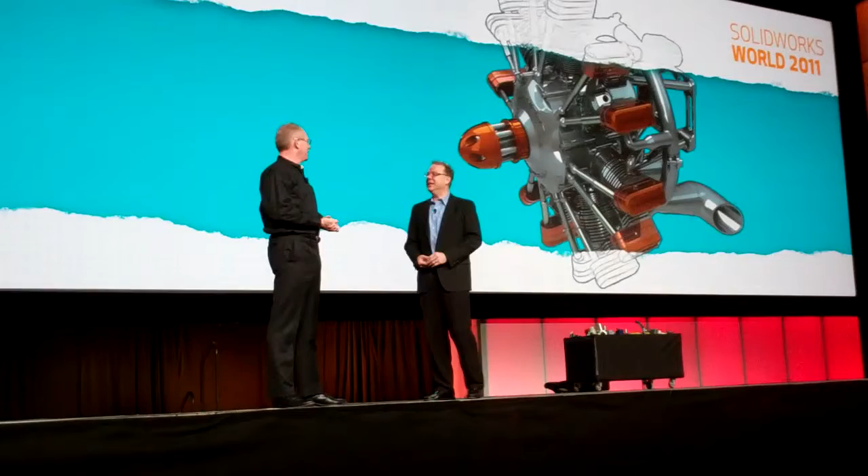Welcome to SolidWorks World, Bill. Thank you, wow, there's more than one user now. Yeah, there's more than one user, right. Back in the day, we could have had SolidWorks World just by going for lunch together. That would have been the whole thing right there. And I understand you just hit 1 million users recently. Yeah, we have over 1 million SolidWorks users now. Thank you all, it's you guys that do it. This is 5,000 seating capacity, right? The other 995,000 showed up. It doubled the population of San Antonio. Oh yeah, that's true, we might have more SolidWorks users than would fit in the city. That would be a nice problem.

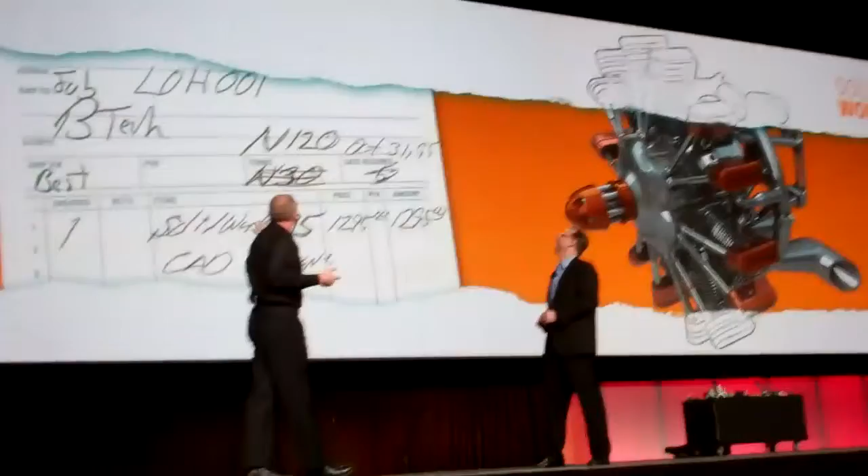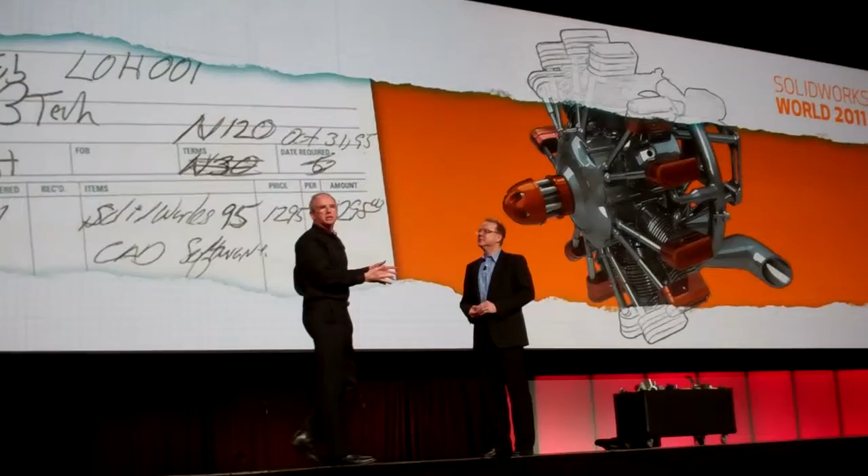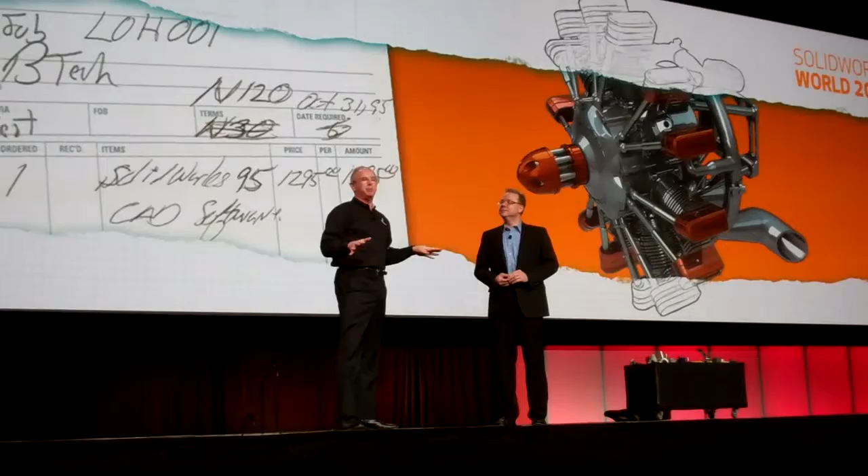Bill, thanks for being customer number 1, but beyond just giving us the order for SolidWorks, Bill gave us a whole lot more. Before we ever took any orders, when I was deciding whether or not to start the company, I went to Bill for advice. He was my friend and advisor, and he gave me encouragement. He said, John, go do this thing. Without his advice and support and encouragement, we all might not be here today. So thank you, Bill, again. Okay, that was great. I don't know what you're thanking me for, but I should be thanking you, I think. Well, anyway, it's been great.

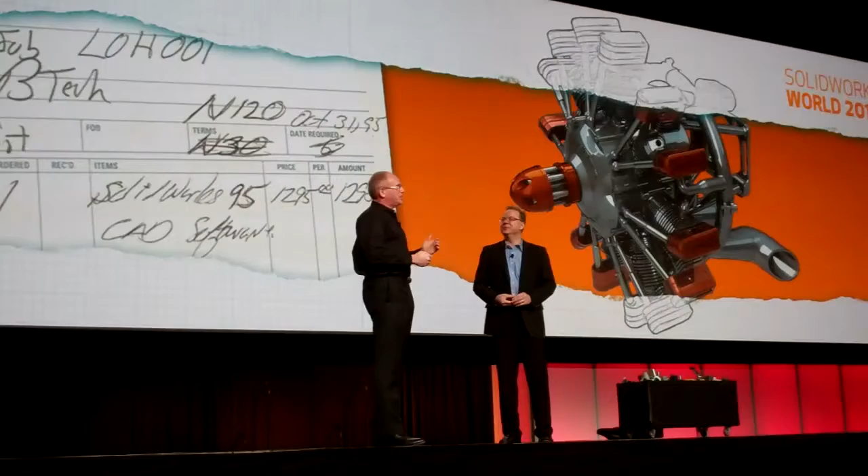So Bill, there were lots of robots in the world for many years, lots of old robots existed before you started Barrett Technology, right? Yep. So why start Barrett? Why build new robots?

Well, we wanted to have robots that worked around people. Before we came along, there was sort of what we call robotics 1.0, which is robots that go from point A to point B, point A to point B, and do that for 5 years. We wanted to go beyond that. These robots were very dangerous around people, and the rule was to segregate the people from the robot. It didn't make sense. If you were going to look into the future and there was going to be, for example, robotic surgery, how do you separate the robot from the person? So we call that robotics 2.0, and I think that's starting to come into its own.

And we actually have video here, starting with the handshake. These are Bill's robots from Barrett Technology, robotic arms. Right, and so those aren't pre-programmed, the handshake is not pre-programmed. It's just following the forces of the handshake. I think that's iconic of working with humans.

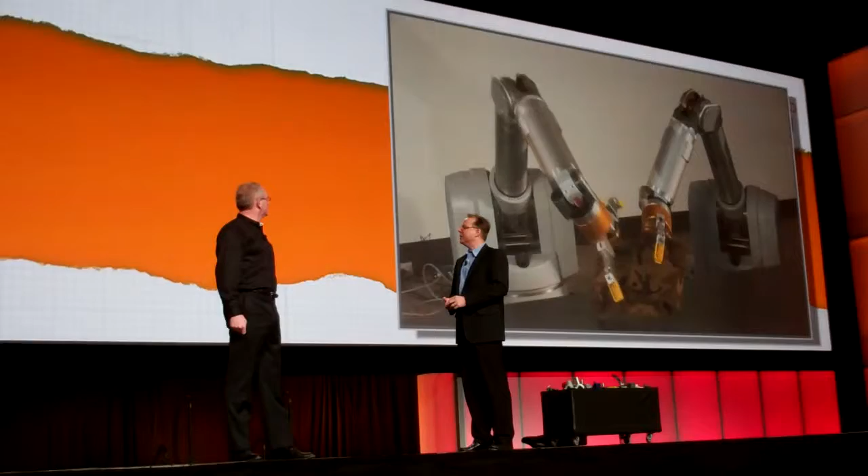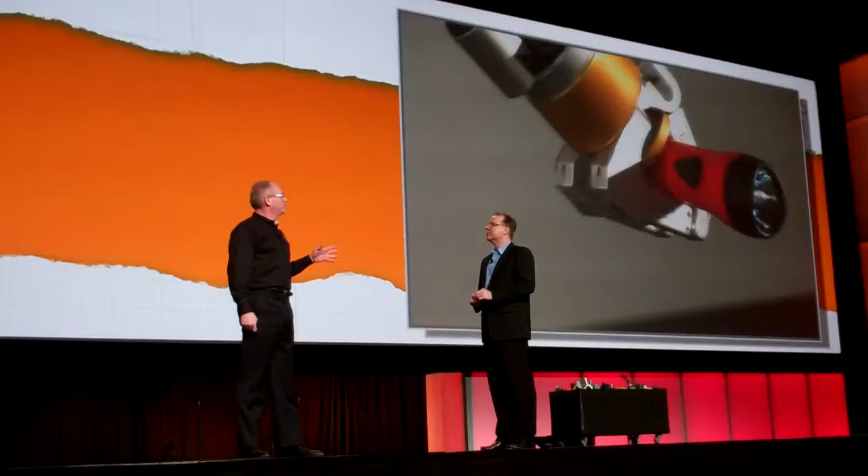Yes, working with humans, and they're getting force feedback as they do this task. They can feel the very gentle torques as they're grabbing this bag and opening it and manipulating it. In the real world, they might be looking for something other than a flashlight. Yes, but you can tell by the military garb. It's amazing the way you work with soft objects, I've seen Bill's robots unzip a zipper. Yes, look at this, it's following a path, a trajectory at the end point, and doesn't know those people are going to show up. There goes the warranty. No warranty left. But again, it's amazing, having been around Bill's robots a bit, not only are they human-friendly when they touch you, but when you touch the robot, it's just really cool. You grab the robot, it's like grabbing someone's arm.

That's right. So what kinds of technology did he have to build in order to get that to happen? Well, we build gearless drives. Robots today, all robots other than ours, use some form of either gear or harmonic drive, which is a form of a gear. We don't, we use gearless by using cables, aircraft cables. We get extraordinarily smooth torque, which is something we need in order to do this force feedback that we have with people. And no gears. And no gears. And you also have virtually no backlash. That's right.

So friction, the backlash is gone. The friction is very low. Really nice mechanical drives, you know, it's really made our products work well. And so on the mechanical drives, you pioneered the cable drive system.